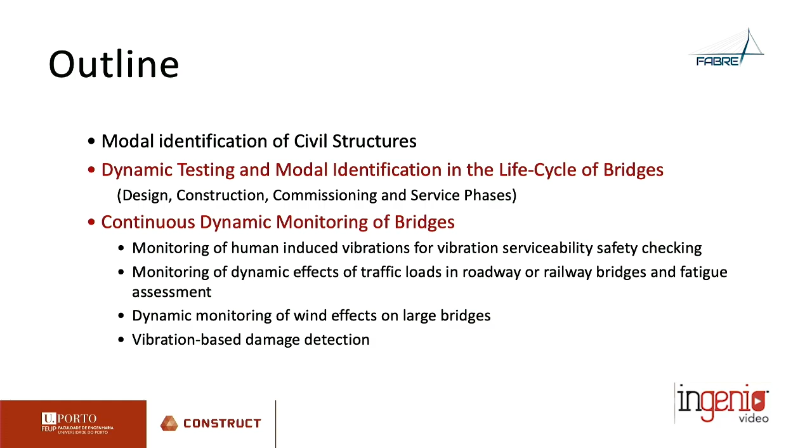I will begin with this very brief introduction. As it is well known, the first modal identification tests have been based on knowledge that came from our colleagues from mechanical engineering using forced vibration tests.

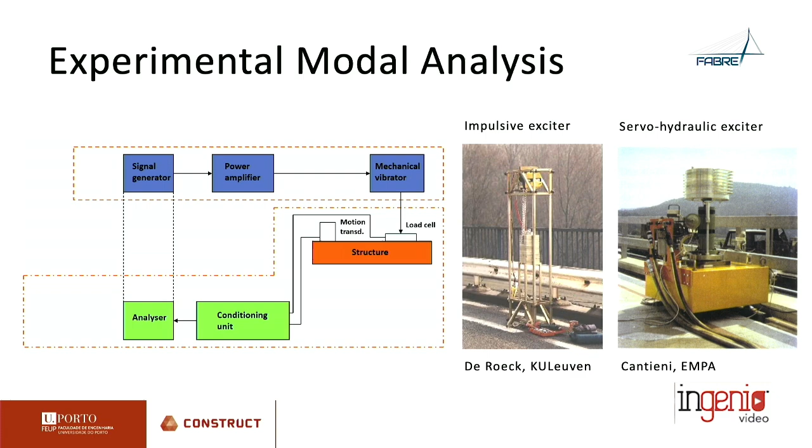There were some attempts initially to build and apply exciters specifically designed for large structures, for bridges or dams, like impulsive exciters or servo-hydraulic exciters. But we could soon understand that when dealing with large bridges, it is really difficult, expensive, and cumbersome to use and apply large exciters - that was done in some bridges like the Tatara Bridge.

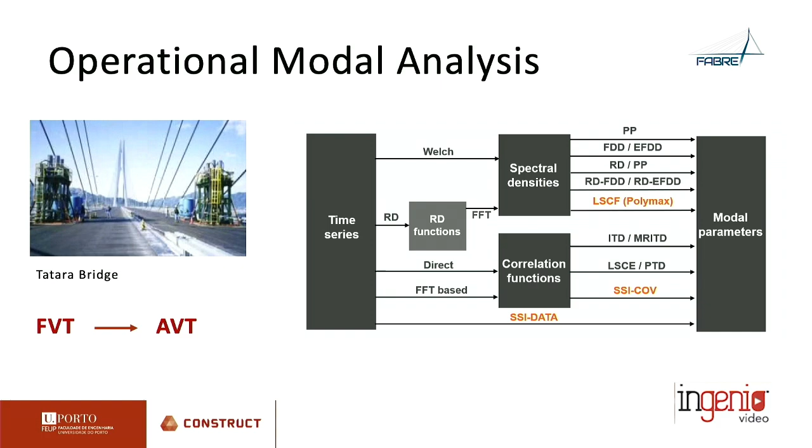But we could soon understand that the advances at the technological level in terms of transducers and digitizers made it feasible to use ambient vibration testing, and many different methodologies have been developed in order to extract accurate estimates of modal parameters, based in some cases on spectral densities, in other cases on correlation functions, in other cases directly on acceleration time series. And we have nowadays even commercial software that we can easily apply for that purpose.

After saying so, I'd like now to essentially follow the several phases of the life cycle of bridges, giving some examples of the usefulness of dynamic testing.

At the design phase, it is well known that, at least in wind engineering, it is very important when we're dealing with large bridges to perform tests in physical models, to clarify aspects related with buffeting, vortex shedding, lock-in, flutter instabilities, cable vibrations, and so on.

But also in the field of seismic engineering, testing physical models of bridges can be useful. An example is the work developed in the past by our colleague from our group, Elsa Caetano, based on the physical model of the Jindo cable-stayed bridge. She could clarify the role that the distributed mass of cables can play in terms of the severity of the seismic response.

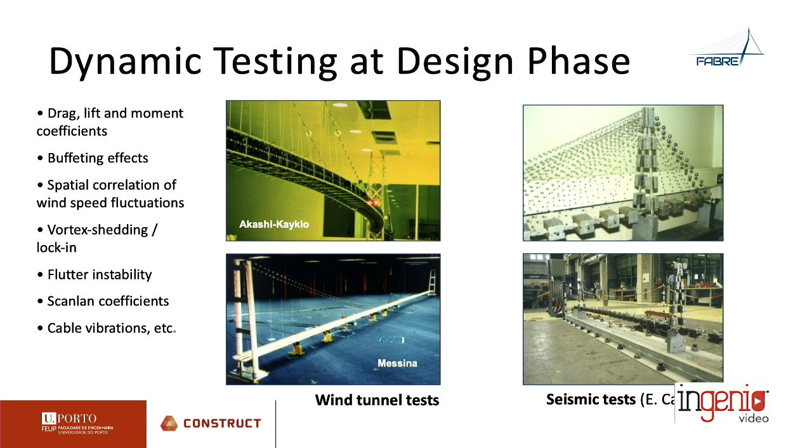Passing to the construction phase, different examples can be presented. The first one is related to the bridge you can see on the left-hand side, Infante Henrique Bridge, a new bridge in our city, Porto, to install a new metro line.

The construction of this bridge required a very complex procedure. It was necessary to build provisional piers that were afterwards removed, and to install retaining cables and suspension cables of the arch. We were contracted to monitor the evolution of axial forces in these cables by measuring ambient vibrations, based on the vibrating chord theory applicable to most cases.

In some other cases, we had to develop finite element modeling for calibration. This was a work developed over 15 months with more than 600 control points, which was very useful for the designer and for the construction company.

This was also the basis, in terms of knowledge and tools, to perform afterwards a more ambitious work: the evaluation of axial forces in the cables of the suspension roof of the London Olympic Stadium, some years ago.

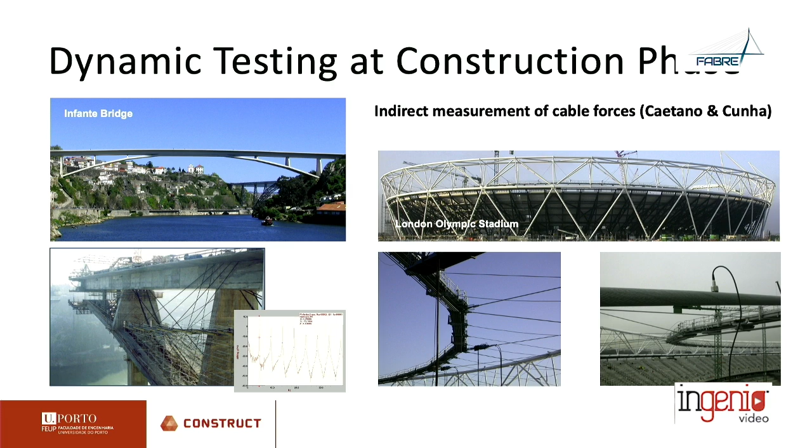Also in terms of the construction phase, another example relates to bridges with lively behavior, where we need to introduce vibration control devices such as TMDs, tuned mass dampers. In this case, we had an arch steel bridge prone to excessive vibrations due to joggers in some circumstances and also continuous flows of pedestrians, so it was necessary to install two TMDs to mitigate these vertical vibrations.

Dynamic tests were very useful for the construction of the TMDs, and afterwards for the accurate identification of the dynamic properties of the bridge, the correct tuning of the TMDs, the evaluation of structural damping, and the observation of the bridge's response to continuous flows of pedestrians, in particular during the inauguration day.

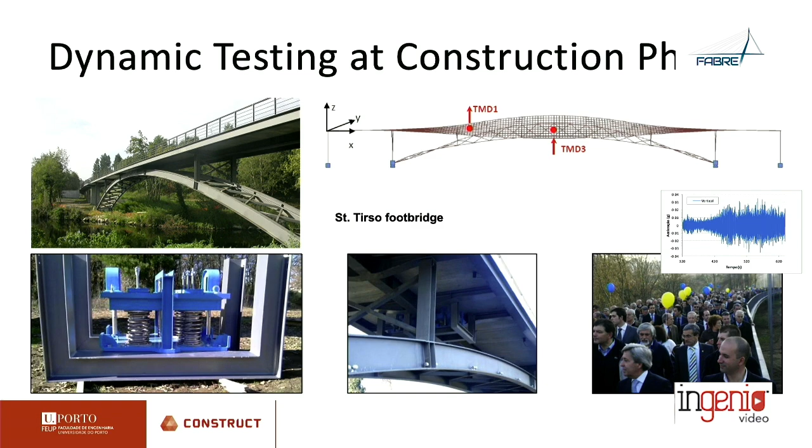But a more paradigmatic case is probably the Coimbra footbridge, where from the beginning we understood this bridge would be prone to excessive lateral vibrations, like those that occurred in the famous Millennium Bridge in London.

Using the formula developed for that purpose, we estimated that about 140 pedestrians could trigger the lateral lock-in problem, with a nonlinear increase of vibrations, assuming 1% damping.

Immediately after construction of the bridge, we performed ambient vibration tests to accurately identify the natural frequencies and mode shapes. The mode shapes look rather strange because the bridge is asymmetric both in plan view and in cross-section, so we don't have pure modes.

This work was essential to develop a new finite element model of the bridge, calibrated to achieve a good match between identified and calculated parameters. This permitted evaluation of the modal masses that were the basis for the final design of the TMDs.

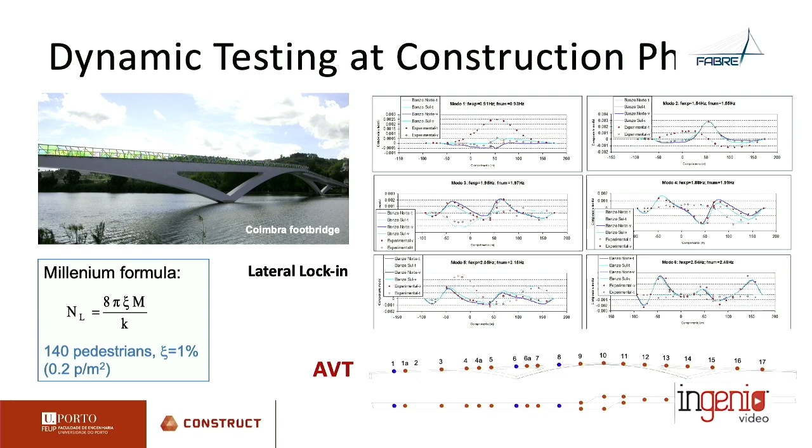We also developed free vibration tests, releasing masses of 2 to 3 tons from different points of the bridge to create free vibration responses, used to accurately estimate modal damping ratios. We noticed that the identified damping was about half of what had been used in the design, about 0.5%, which increased the level of problems in terms of dynamic response.

So we performed crowd tests with a group of 150 students from our school, crossing the bridge with an increasing number of pedestrians. We clearly understood that with 70 people on the bridge, the lateral lock-in was triggered, reaching a maximum lateral acceleration of about 1.2 meters per second squared, representing 12 times the limit suggested by the footbridge guidelines, both by Sétra and HiVoSS.

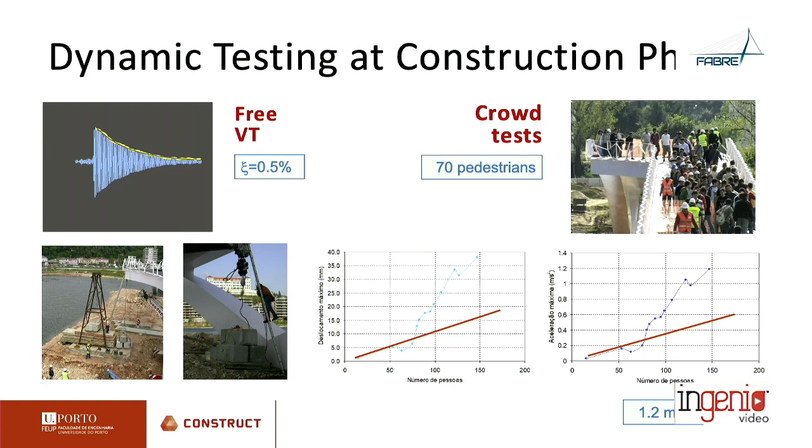This required the design of an important TMD placed at midspan due to space limitations, split into 6 different units whose oscillation contributed to mitigate the lateral vibrations of the bridge. With this, we tried to increase the damping by more or less 10 times.

This damper is formed by an additional mass of 15 tons connected to the bridge by springs and dashpots, duly designed for good tuning and efficiency. After installation of the 6 units, we could immediately see they did not have exactly the same behavior, which reduced the performance of the dampers.

So we decided to perform a forced vibration test using a shaker of 1 ton of mass, constructed at our mechanical engineering department. You can see here two plots with FRFs relating the lateral force induced by this shaker to the response in the several masses of the different TMD units and the bridge.

In one case we have a very sharp peak representing damping of about 0.5% when the damper is not yet activated, because activating it requires overcoming some friction in the rods. After activation, the FRFs are clearly modified, and this peak is transformed into a smooth hill, meaning an increase of damping from 0.5% to about 4%. This was enough to control the situation.

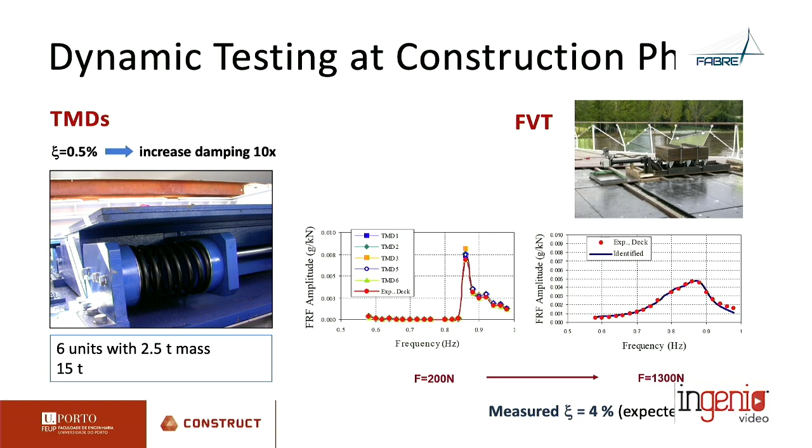However, it is probably at the commissioning stage that ambient vibration testing is more popular. And a classical example is the Vasco da Gama cable-stayed bridge.

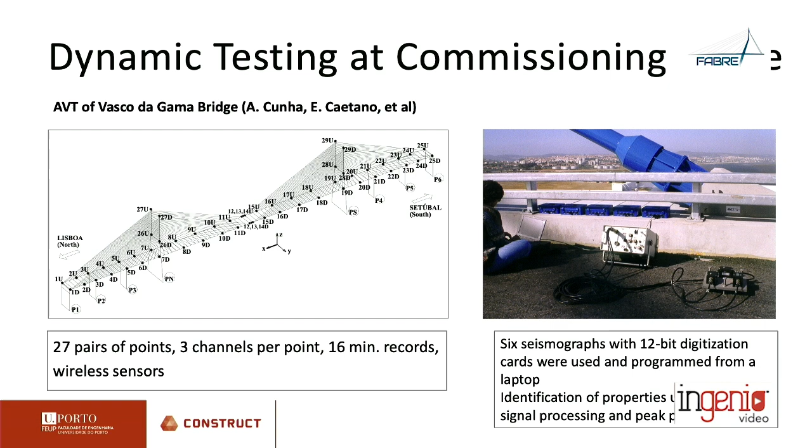We used there for the first time a wireless solution based on different seismographs, 6 seismographs, duly programmed and synchronized. We used 2 pairs of seismographs in 2 reference sections, and the other 2 were moved along the deck and towers. We used 27 pairs of points, 3 channels per point, 16-minute records, so every 20 minutes you move the set of measurement. Using the classical peak-picking method, we could get very accurate results at that stage.

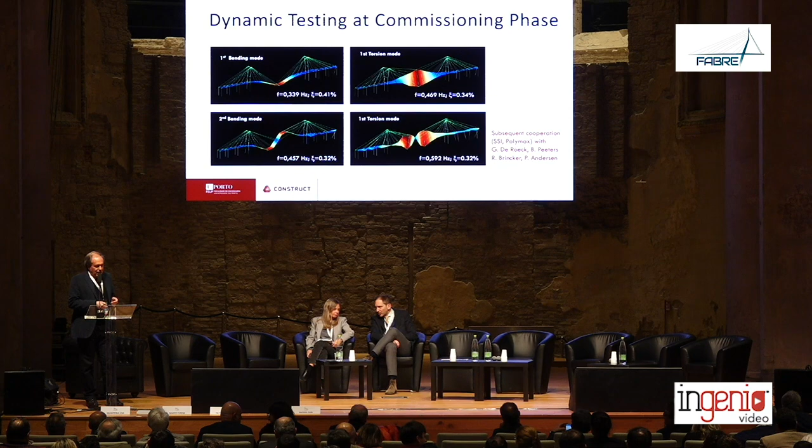After that, we immediately initiated a very interesting and fruitful collaboration, both with KU Leuven, the team of Guido De Roeck, and also with Aalborg, Rune Brincker, and we could develop our own routines of more sophisticated methods like SSI, or poly least squares complex frequency domain, Polymax, getting nice results like this.

It is interesting to mention that one component of the test was the free vibration test, in which we released a mass of 60 tons from the deck, increasing significantly the levels of vibration of the deck and creating nice free vibration responses. The mass was put in a barge. When the tide was low, the cables were cut, and we could get these very interesting results that were processed.

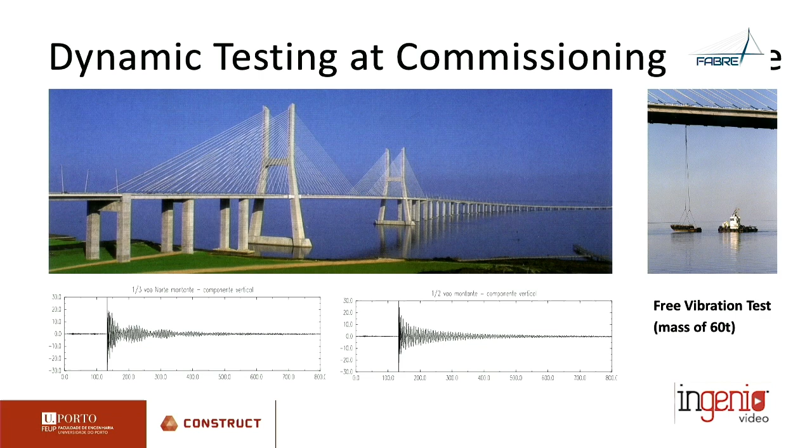Well, after this, we have tested many bridges in Portugal and abroad, and a very famous example, due to a nice collaboration with CSTB in Nantes, was the ambient vibration testing of the Millau Viaduct, this very nice multi-span cable-stayed bridge designed by Michel Virlogeux with the collaboration of Norman Foster.

As we were not required to identify torsional modes, we decided to use only measurements along the central axis of the bridge. In just one day, using 4 seismographs, still synchronized, we could measure the bridge along 28 measurement sections, using also 16-minute records, and get very nice results.

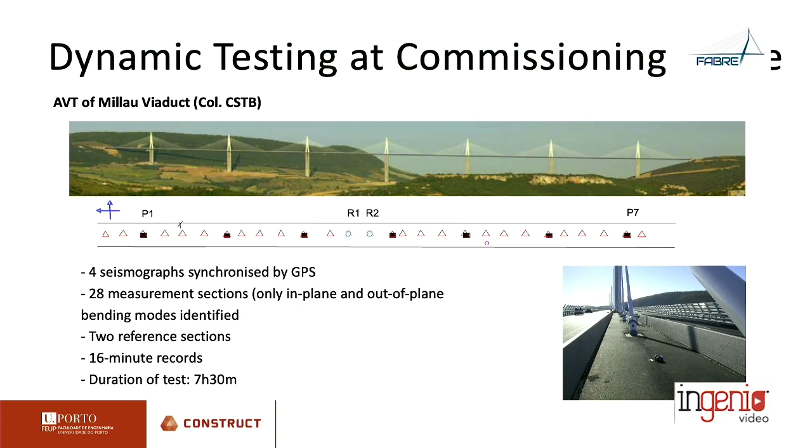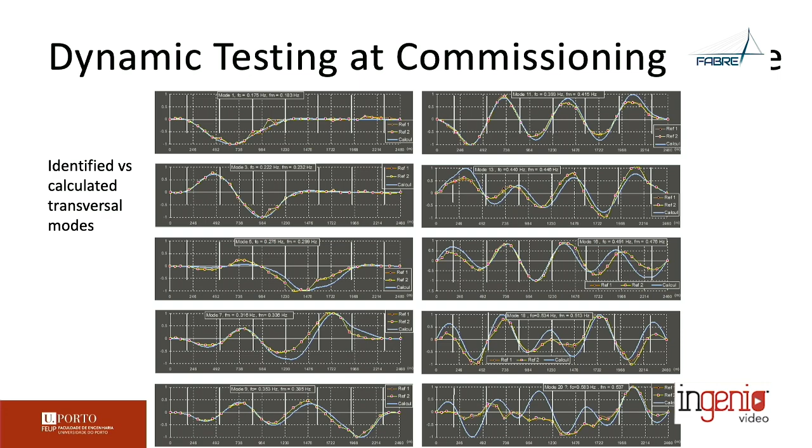The same happens for the first 10 lateral bending modes, except for the higher order modes, probably due to the difficulty of the designer to conveniently model the lateral interaction between piers and foundation.

Well, a more demanding example was the retesting of the Humber suspension bridge during the service phase of this bridge. This stemmed from a collaboration with our colleague James Brownjohn. In this case, we used 10 triaxial seismographs, 6 from our laboratory and 4 from them. And we could use 76 measurement sections along the 3 spans of the bridge, upstream and downstream.

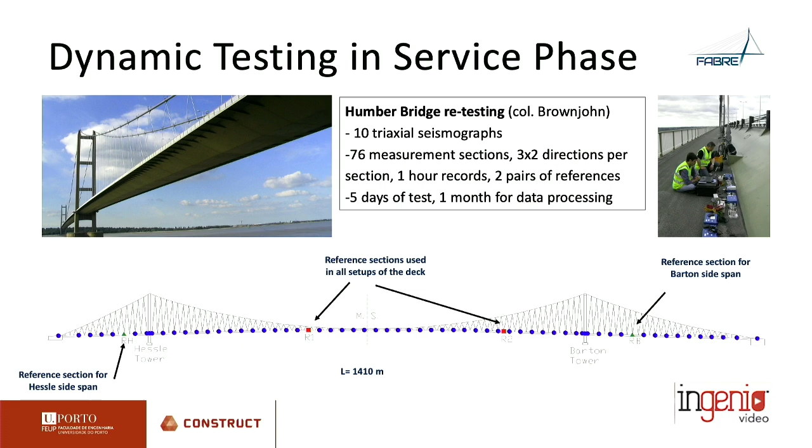As the bridge is very, very flexible, we decided to increase the time of observation per setup to 1 hour with 2 pairs of references. So this required 5 days of testing, in England, even in summertime with rain and long distances. So it was a more demanding test.

The information collected was immediately processed in the field using the classical peak-picking method, and you can see on the left-hand side above the average normalized power spectra. It is interesting to see that due to some peculiarities of the boundary conditions, some mode shapes are global mode shapes of the bridge, others are local mode shapes of each one of the three spans of the bridge. That can be understood taking into account the coincidence of the peaks, because there we have the representation of those spectra for the three different spans.

At the bottom we can see a stabilization diagram, because we applied afterwards also the stochastic subspace identification technique, extracting accurate estimates, for instance, of the first 8 vertical bending modes, also in the range 0 to 1 Hertz, of the first 4 torsional modes, and finally of the first 6 lateral modes. So a large number of modes of vibration in this range 0 to 1 Hertz.

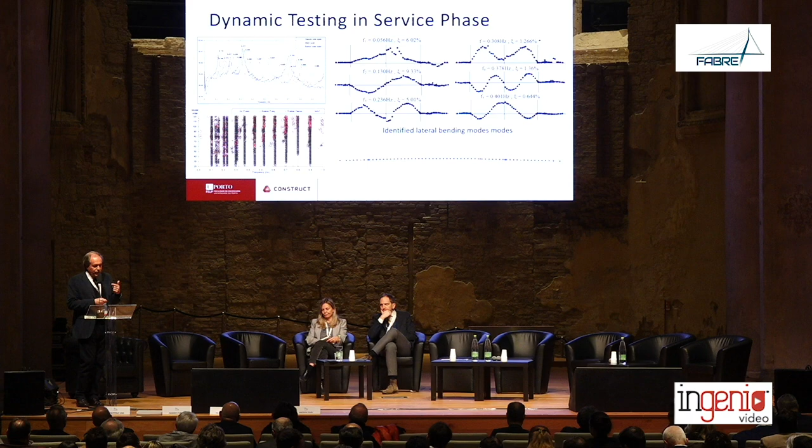And I call your attention that the fundamental mode has a period of 18 seconds. Even so, we could identify accurately this frequency and mode.

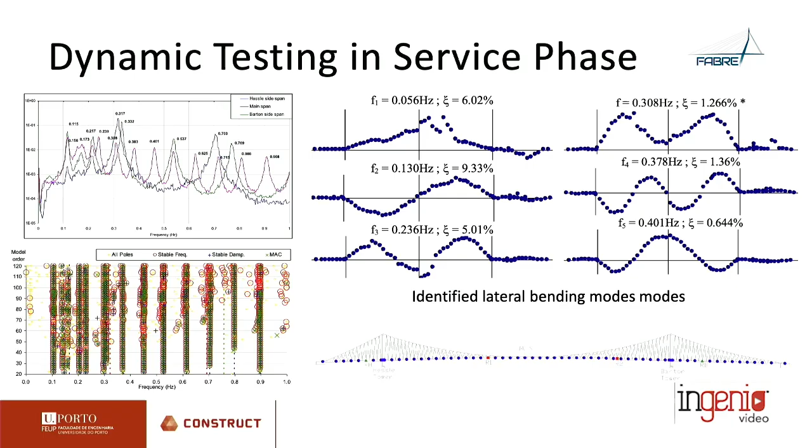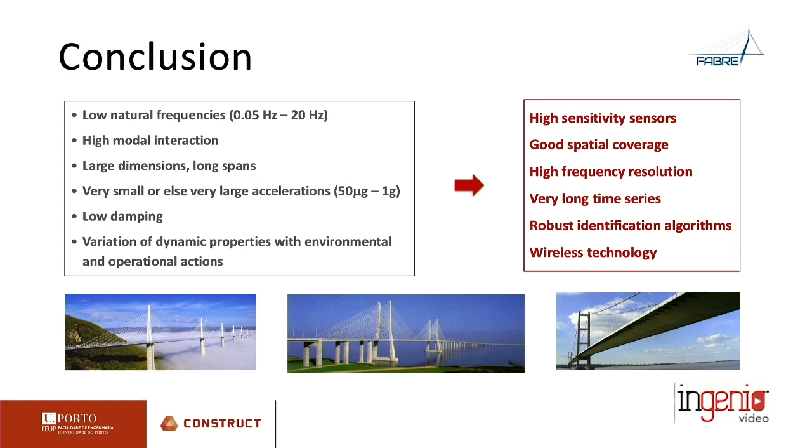I can say that, in fact, using a wireless solution with high sensitivity sensors, with good spatial coverage, using times of observation long enough to get high frequency resolution, and using, of course, robust and modern identification algorithms, we could deal with large structures with very low natural frequencies, with low damping, with some significant modal interaction, and get good results.

Since 2007, our focus has been on continuous dynamic monitoring, and we have tried different implementations in different structures with different topologies. We deal with many structures, many bridges that get older and older. Some are complex systems, so it's useful to take into account advances in measurement technology, data processing and retrieving. This creates increasing interest in permanent dynamic monitoring, and we need to develop appropriate software and tools to extract relevant features from the collected data and make online evaluation of the bridge condition.

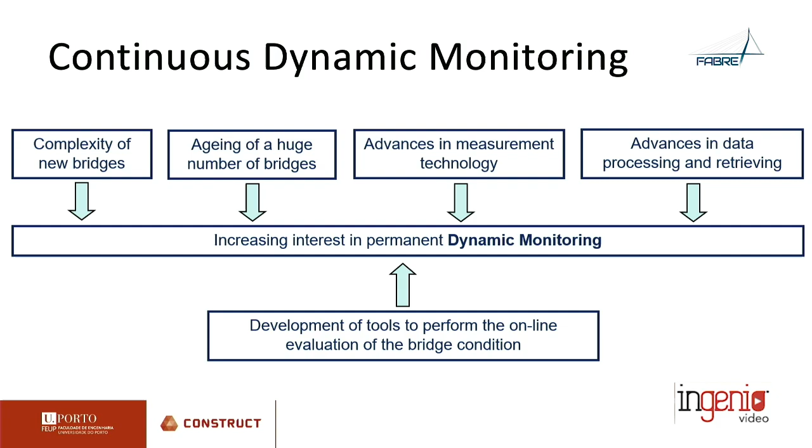I'd like to stress different perspectives of monitoring. I will begin with the simplest one. I recall the example of Coimbra footbridge, that bridge that could have lateral vibrations and that deserved the introduction of TMDs. The owner required also, for prudence, the monitoring of the bridge during 5 years. We introduced a simple system with 6 accelerometers.

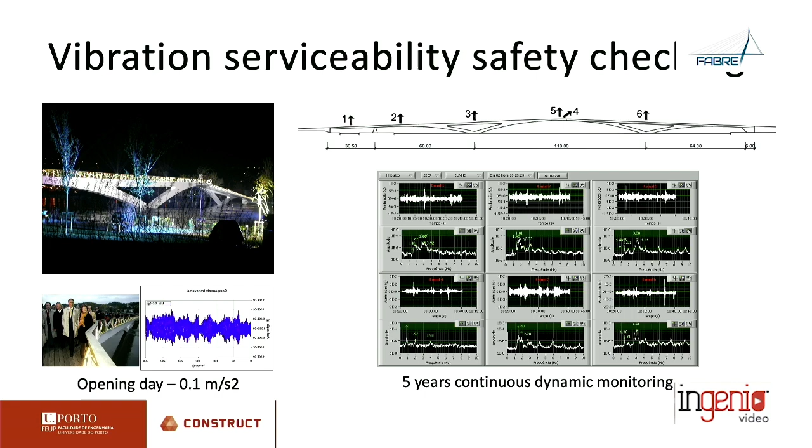We developed a LabVIEW application to provide immediately information to the designer, to the construction company, to the owner and ourselves. After a couple of years, we could very well demonstrate that the TMDs had been efficient, because during all the period observed, the maximum daily lateral acceleration never exceeded 0.1 meters per square second, which is the value recommended by the guidelines. During those dynamic tests before the installation of TMDs, we had 12 times this.

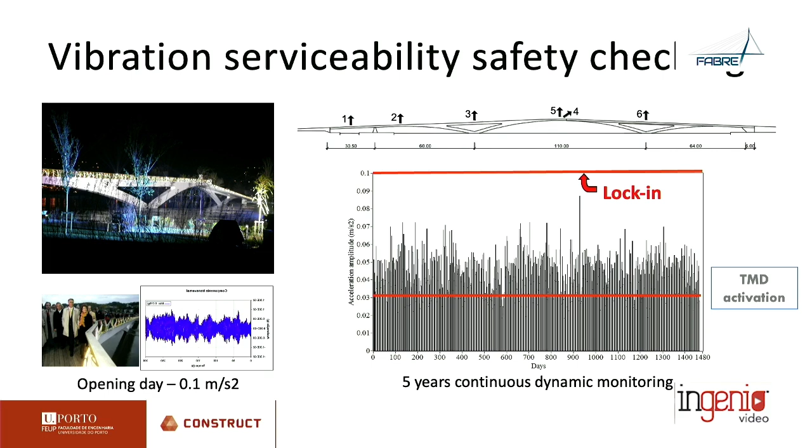Another perspective is the use of continuous dynamic monitoring to characterize the dynamic effects of road traffic. An example was the study developed with the collaboration of a former student that is presently our dean at Porto, Rui Calçada.

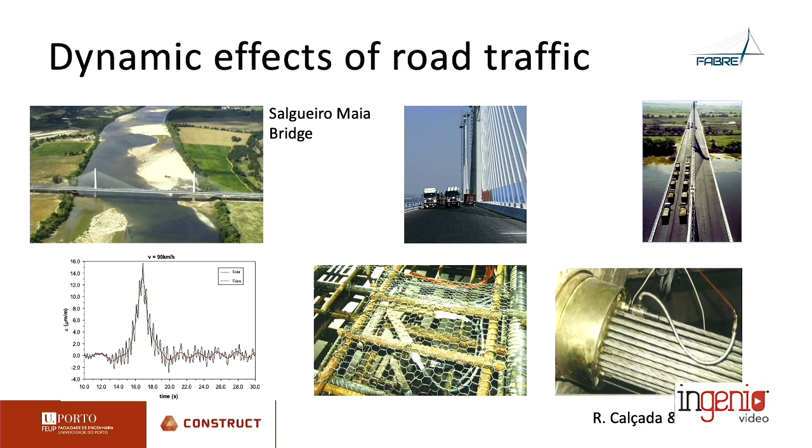In this bridge, we evaluated dynamic effects taking profit from the use of heavy trucks used for the static test at the commissioning stage, and we could measure the dynamic effects induced by this traffic, also due to some poor conditions of pavement roughness that caused some interaction. We measured these effects both using embedded strain gauges in the concrete and also some load cells interposed in some strands of stay cables, in collaboration with Freyssinet.

Also in railway bridges, we have tried to characterize dynamic effects. This is a bridge built after the Second World War. We developed initially an ambient vibration test to calibrate an initial finite element model of the bridge, but subsequently we also implemented a monitoring system based on electrical strain gauges, introduced in different important structural elements of the bridge, also in some rails outside the bridge, in order to be able to characterize the real traffic passing on the bridge.

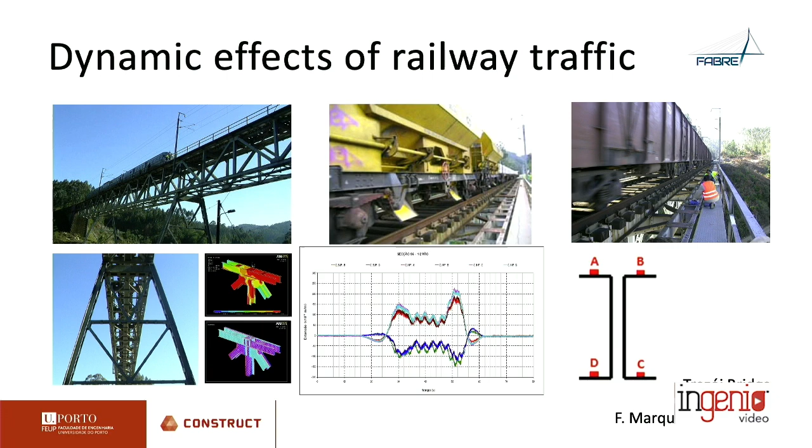This permitted an exhaustive characterization of the fatigue condition of the different structural elements, and to understand which were the critical elements in terms of fatigue. Afterwards we developed a more sophisticated approach that permitted us to understand better a local fatigue problem induced in some lateral or transversal beams over the abutments and the central piers. In this case, some higher order modes of vibration of these structural elements were excited by the traffic. This study was developed in the context of the FATLESS project, coordinated by Walter Salvatore some years ago.

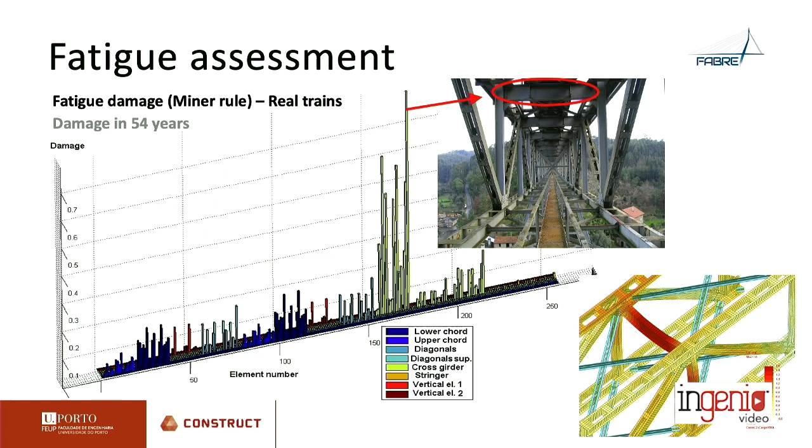More recently, my colleague Elsa Caetano, together with Zhen Sun, a postdoc of our group who is nowadays a full professor in China, together with João Santos from our National Laboratory of Civil Engineering in Lisbon, the entity responsible for continuous monitoring of Lisbon Suspension Bridge, were able to develop a different approach using weigh-in-motion, vision, and artificial intelligence. It was possible to classify the railway traffic and predict fatigue damage caused by specific trains.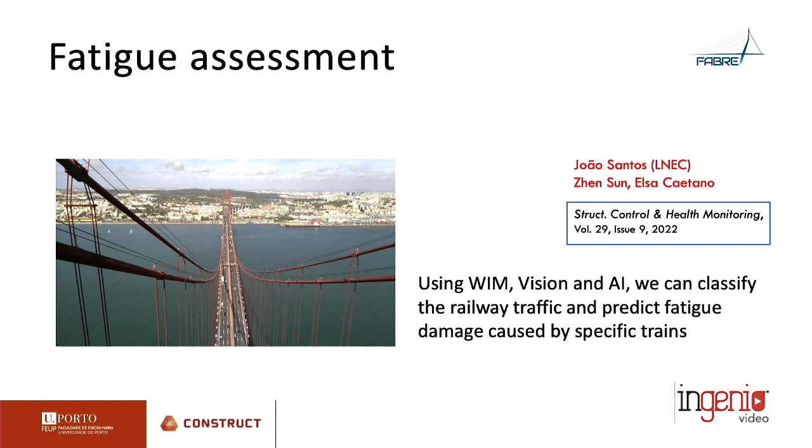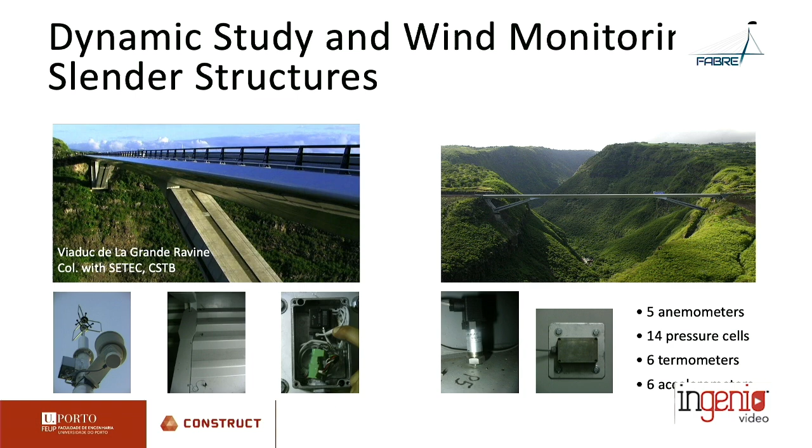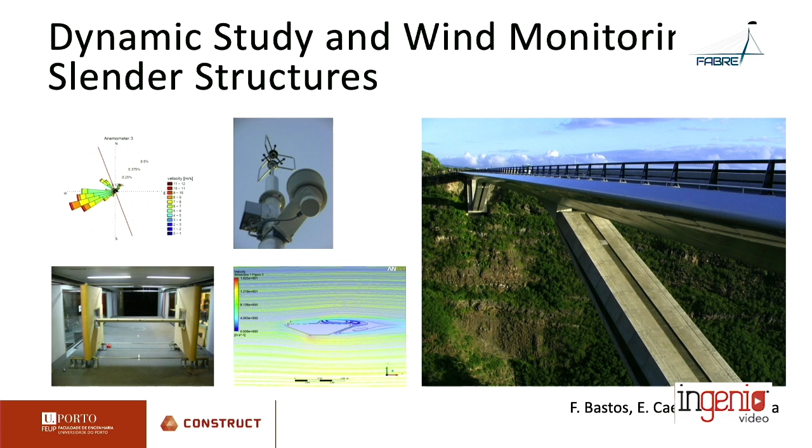Moving to a different direction, some years ago we were contracted by a French company, SETEC, to manage the monitoring system of a very nice bridge built in Reunion Island in the Indian Ocean, an island under French administration. In this bridge they introduced 5 anemometers, 14 pressure cells, 6 thermometers, and 6 accelerometers. This information coming from the prototype during a couple of years was really very important, permitting comparisons between the behavior of the bridge measured and predicted at the design stage.

Another different aspect has to do with the influence of environmental and operational factors on modal variability. When we moved to our new campus in 2000, we had this very nice stress ribbon footbridge designed by a colleague of ours who worked in Stuttgart with the team of Professor Schlaich. This was a very nice research case for us, and my former PhD student, Wei-Hua Hu, who is now professor in Shenzhen, implemented there a monitoring system that permitted us to understand clearly the very high level of importance of temperature on the variation of the modal frequencies.

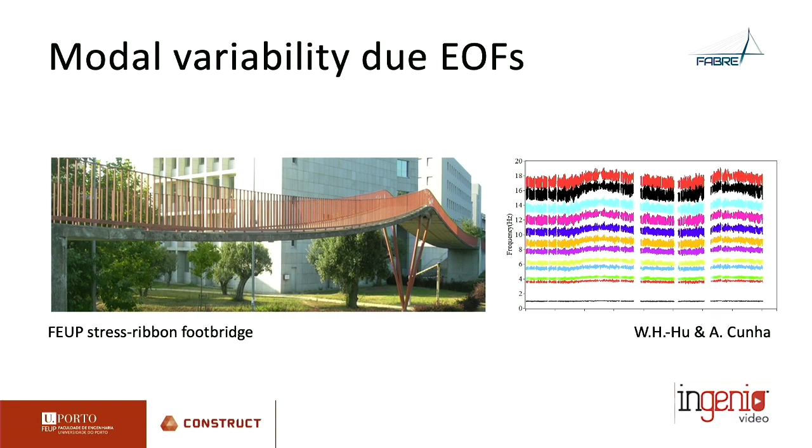After understanding this and how to deal with it, we decided to develop a strategy for vibration-based damage detection. The strategy consisted in collecting acceleration time series from different channels in a bridge. Every 30 minutes we collect data and immediately apply robust homemade software for output-only modal identification.

Tracking the evolution of the natural frequencies, it seems that they are stable, but in fact they are not so stable. Zooming in, we see not only daily variations but mainly seasonal variations, induced in this case especially by temperature and intensity of traffic. So we need to apply suitable statistical methods to mitigate these effects in order to build appropriate control charts where some suitable novelty index, stemming from the variation of frequencies, is able to flag the existence of some abnormal structural change.

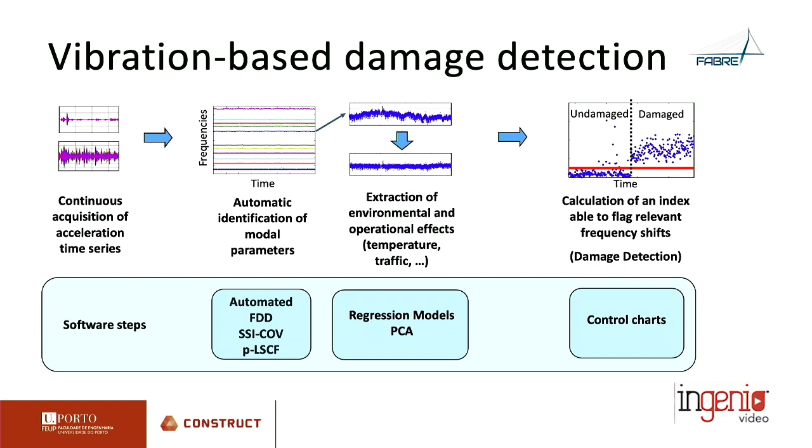This was applied for the first time in the context of a PhD thesis from my colleague Filipe Magalhães on the Infante Henrique Bridge, with 12 accelerometers disposed in 4 different cross sections. Advanced techniques for output-only modal identification were implemented in an automatic and robust way, taking profit from a hierarchical clustering algorithm that permitted creating different clusters of estimates associated with the different types of mode shapes.

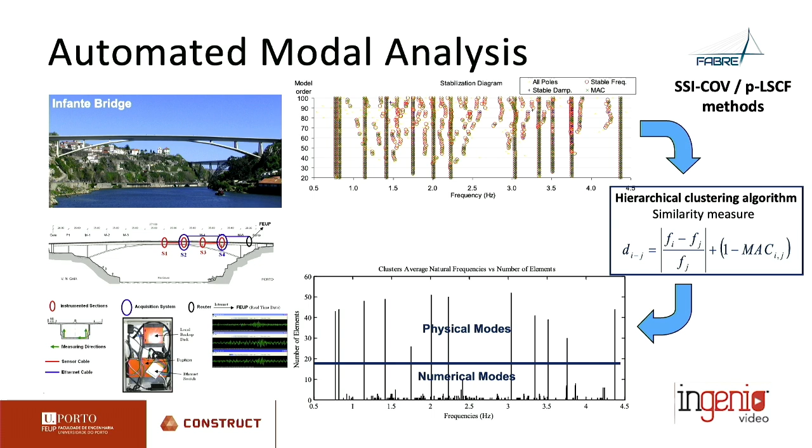On the left side, you can see the tracking of the first 12 natural frequencies in the range 0 to 5 Hertz. During 1 year, it seems that they are stable. Zooming into one of them, you can see that in fact we have daily and seasonal variations. On the right-hand side, you can see these variations for the first 4 natural frequencies during 3 years, and the influence of temperature is very, very clear.

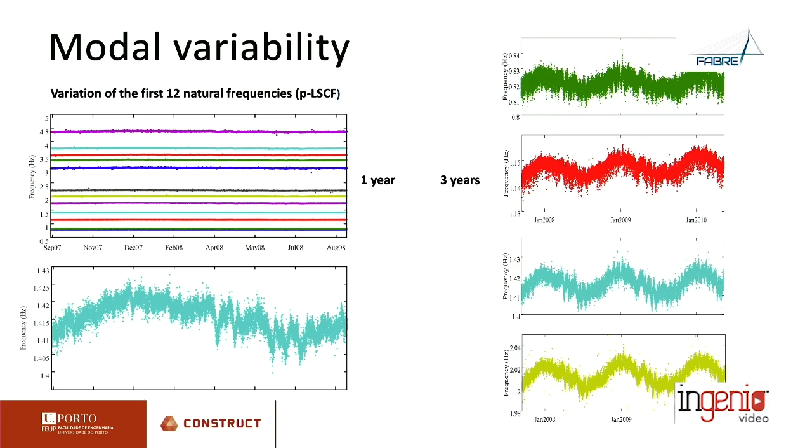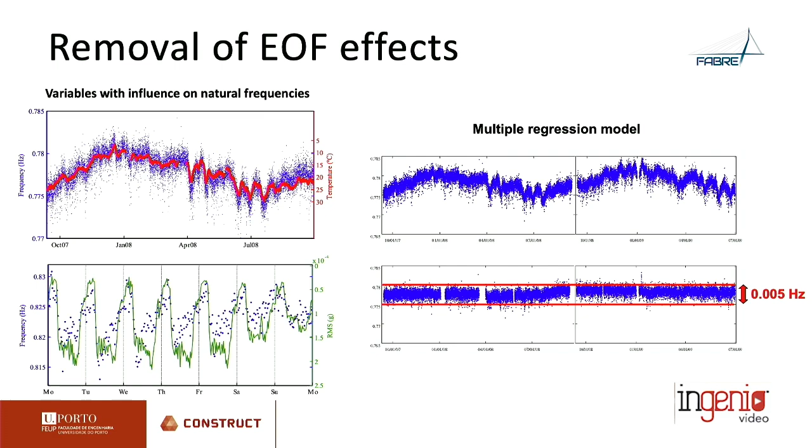So it was really important to develop a multiple regression model to mitigate these effects. You can see on the right-hand side the estimates of one natural frequency during 2 years at the top, without this mitigation. After applying these techniques, the range of variation of the estimates was just about 5 millihertz. So after understanding this, we got confidence in applying vibration-based SHM.

Of course the bridge was new, so it was necessary to create numerical simulations, in this case 4 different damage scenarios, where we locally introduced small reductions of bending inertia, creating relative variations of natural frequencies of not more than 0.2%. Then, using 2 years of data in terms of modal frequency estimates, we changed the estimates of the second year using these percentual variations stemming from the simulations in the numerical model.

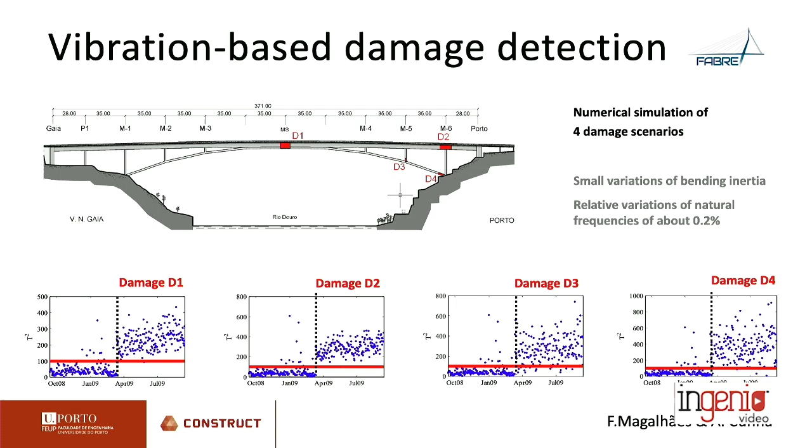What we have seen was that, developing the design of the control charts, in all 4 cases we were able to see that the control charts could flag the existence of some abnormal change. So we are not identifying the location of damage, but we are at least able to detect that some abnormal change occurred.

This was replicated in a service required by a company interested in the construction of a dam. You can see on the left side the dam that was built upstream of 2 existing bridges in a tributary river of the Douro River: a steel railway bridge and an arch concrete bridge. There was some concern that the blasting operations associated with the construction of the dam could affect these two bridges. So we were contracted to implement vibration-based SHM systems in these two bridges, and also to use geophones to control the levels of vibration induced by the blasting operations.

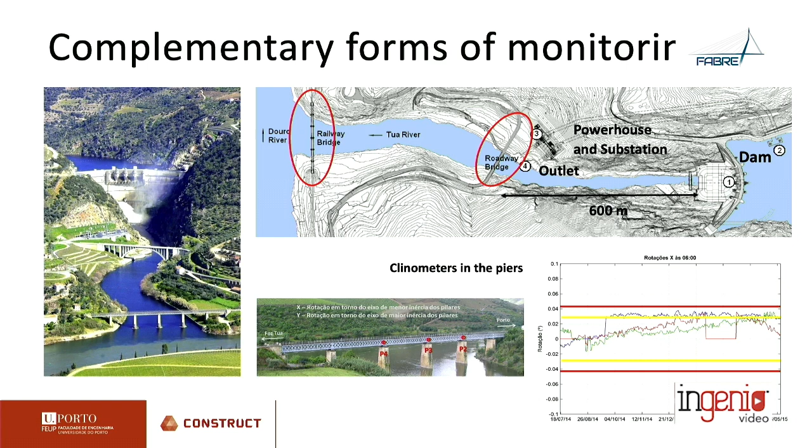I use this example to say that vibration-based SHM is not the only solution. We must be aware that we must always combine information from this monitoring component with other components. In this case, the piers of the railway bridge were very sensitive to variations of flow, and also to works in the foundations to create a channel for pumping water from the main river to the new reservoir. So our National Laboratory of Civil Engineering required complementing this system with a static monitoring system composed of clinometers introduced in these piers, and established thresholds for variations of inclination in these piers.

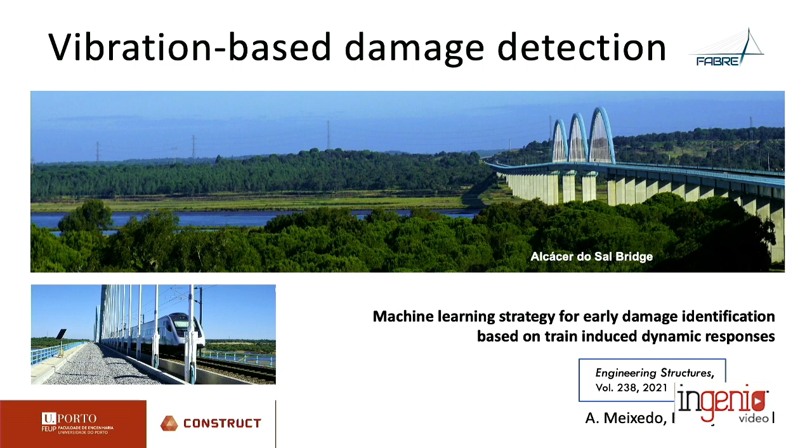At last, I'd like to say that although our strategies for damage detection have been based essentially on the variation of modal frequencies, other colleagues in our research unit developed alternatives. For instance, our colleague Andreia Meixedo, in collaboration with Rui Calçada, developed an interesting machine learning strategy for early damage identification based on train-induced dynamic responses. They use autoregressive models, playing with the parameters of these models, and demonstrated the feasibility of detecting damage just based on the measurement of these dynamic responses due to the passage of trains.

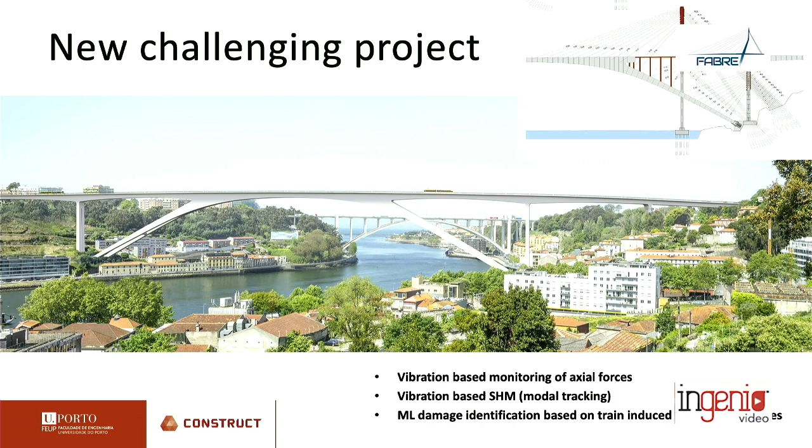So, just to finish this component, I'd like to show you the challenge we are facing nowadays. This nice bridge does not exist yet; it will be constructed in Porto during the next 2 years, I hope, and we have been contracted to process the data from its monitoring system. Our work will have 3 components: vibration-based monitoring of axial forces during the construction phase, vibration-based SHM based on modal tracking, and machine learning damage identification based on train-induced dynamic responses.

I just would like to stress that this technology we developed for bridges can be easily extended to other types of structures, and we have been doing so in terms of wind turbines, first on onshore wind turbines, more recently also offshore.

Using a similar technique, we have been able to get clusters of modal estimates that we represent here in a so-called Campbell diagram, relating the frequency estimates with the rotor speed. Beyond these horizontal clusters, we notice also some inclined clusters that have to do with frequencies of the rotor.

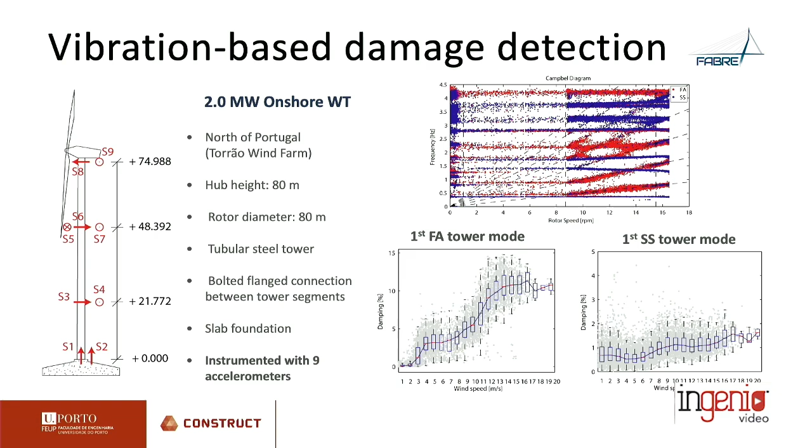An interesting aspect has to do with the evaluation of aerodynamic damping that we can feel, for instance, in the first fore-aft tower mode, in the direction perpendicular to the rotor plane. The damping increases significantly with wind speed, and that doesn't happen naturally in the side-side mode or direction.

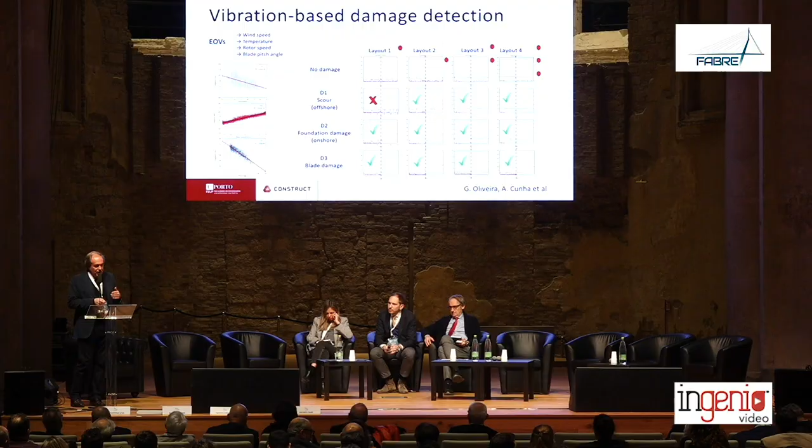In this case, we have also defined several damage scenarios, based on real values measured and mentioned in the literature, in terms of variations of natural frequencies associated to scour in offshore foundations, to foundation damage in onshore, or with blade damage.

We took into account several environmental and operational factors like wind speed, temperature, rotor speed, blade pitch angle. And the application of the same techniques could also demonstrate the feasibility of detecting some abnormal structural change in most of the cases.

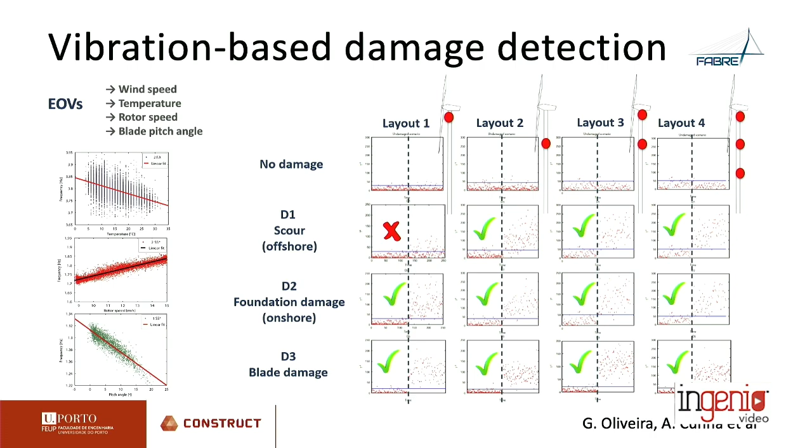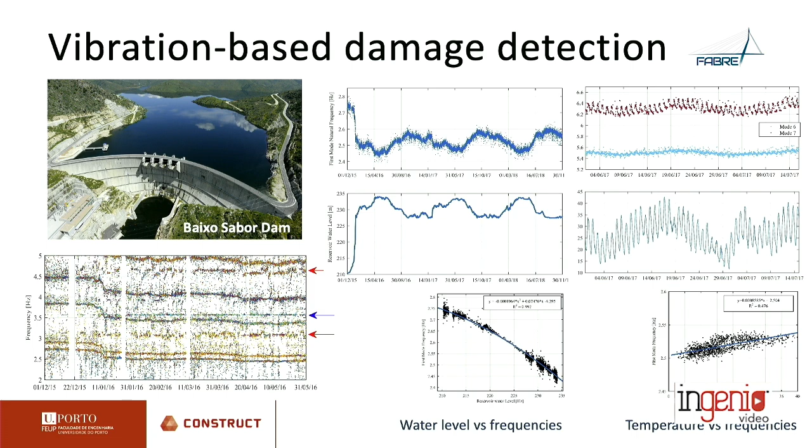So we could analyze the correlation between the variation of water level with natural frequency estimates, and beyond that we could also analyze the influence of temperature, which is not so significant but exists. The same type of conclusion was obtained.

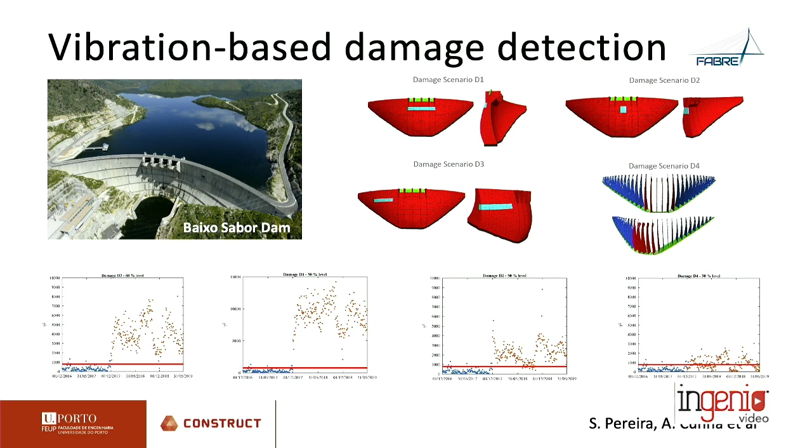So I can conclude saying that we presently have technology available, both in terms of accelerometers and digitizers, but also in terms of data analysis and control and transmission systems, that permit us to develop very accurate and reliable modal identification tests and develop continuous dynamic monitoring programs. The high quality databases created can be used for different perspectives, as I could mention in this presentation, related with vibration serviceability checking, with evaluation of traffic induced effects and fatigue assessment.

With aerodynamic studies, with measurements on the prototype, influence of environmental and operational factors on the modal variability, or vibration-based SHM. So this is the contribution I can give.

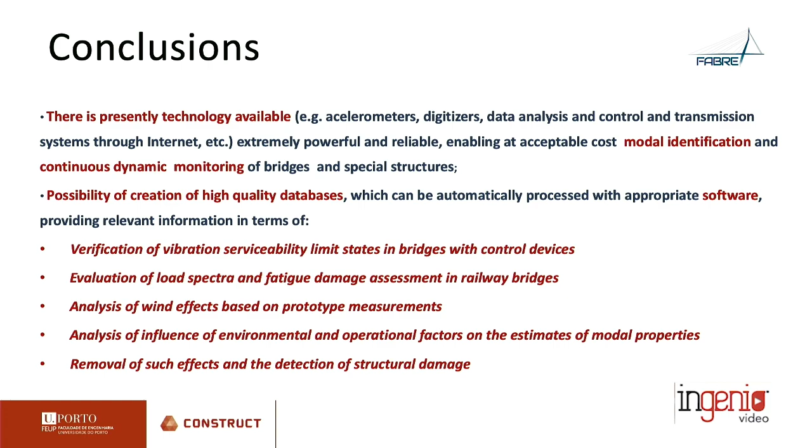I just regret not being able to speak in Italian, but I hope you could understand. So, thank you.

Thank you, Alvaro. Really great keynote presentation. Your work was instrumental to developing an approach that you have seen and you will see also tomorrow that ANAS is applying in 1,000 bridges in Italy right now with the help of the Fabre Consortium and some other universities.

So your question was, is it worth it? So we can say it's worth it, right? Yes. This is not a miracle, but it gives good results. It has given good results. And I must say that at the beginning I was a little bit suspicious because, in fact, we deal with very small variations, and we have to take into account the disturbance caused by temperature, intensity of traffic, things like that. But the results demonstrate the feasibility of using this technique in these cases.

But I always like to say that this is a component of monitoring. There are other components, and if we can combine them, we can naturally get much better results. Yeah, okay, thank you, we are all on the same line. Thank you. Okay, thank you, Álvaro.